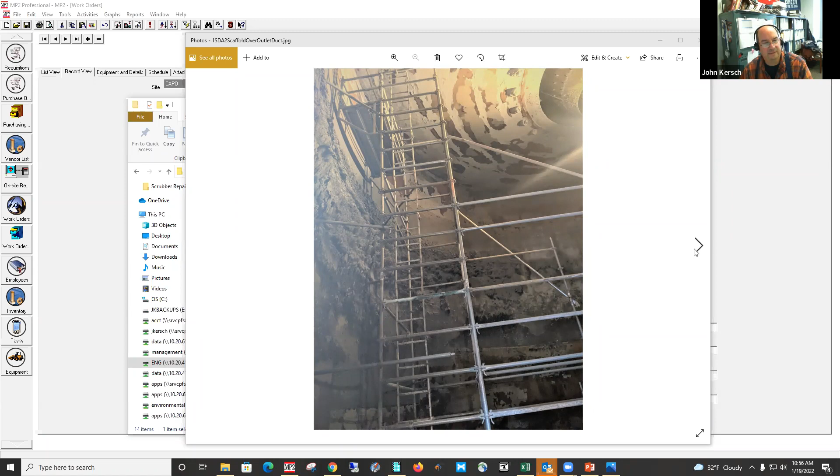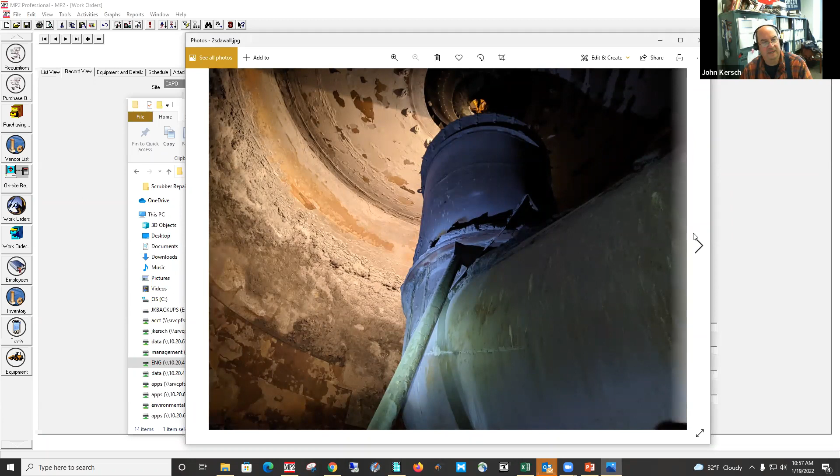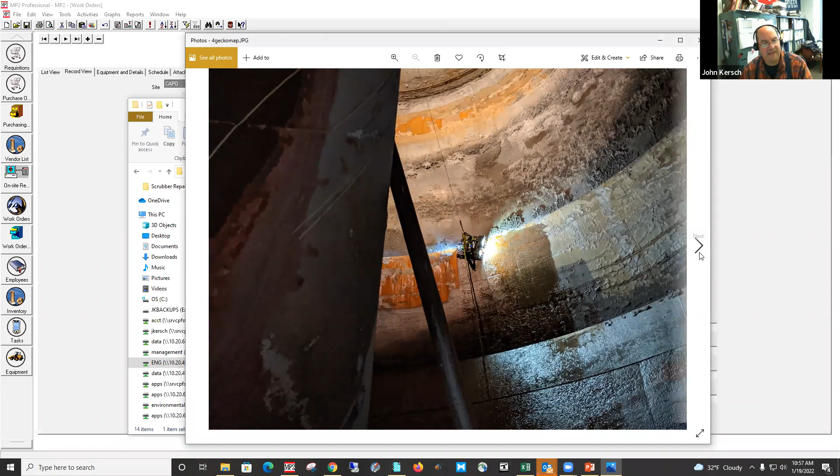So we brought the Gecko robot in, and there's just another shot here. You can see pretty distinctly here where it looks like it's kind of rusty above and below that stainless band that had not been touched at all. And so the Gecko robot comes in and he does his runs around those bands, and he comes back at you with some UT readings all around the scrubber.

And this top picture, if you will, any place that it's white, that's where the stainless was. So you can see where it's kind of choppy and stair-stepped. And just by the thickness readings that we were getting, there was a lot of concern that the scrubber could potentially collapse at either one of those bands. They were both below what B&W later determined as being a safety factor that was going to hold up.

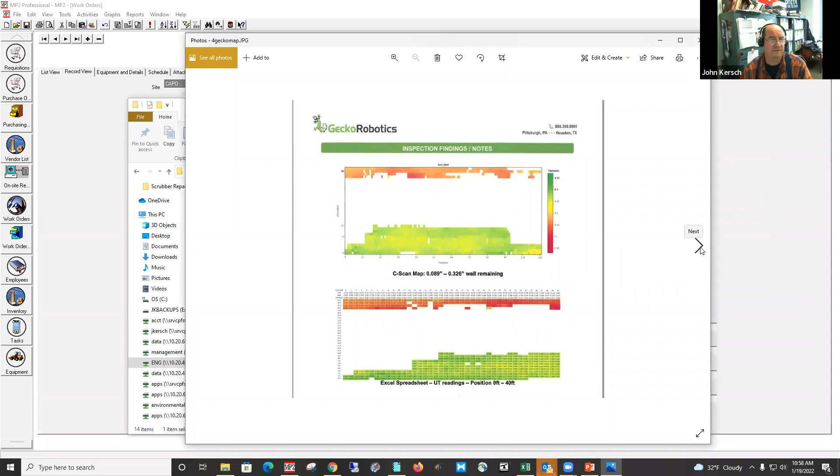With the plant having a projected life at the time of just another 3 years, it was kind of like a what do you do kind of thing. So we formulated a plan with B&W to do some exterior cladding, and we also looked at doing some temporary supports from the outside. That was one idea, to take the load off of the walls of the scrubber. Another idea was to support it up at the top, and then you can see, the cladding there was 13 courses, if you will. And so the repair fix was to do 3 at the top and a couple at the bottom, and then any place else that we had found thinning.

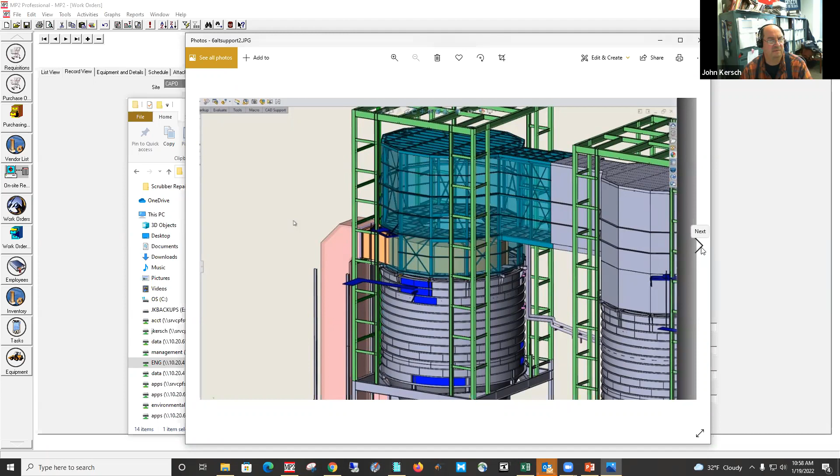Problem became there was a concern about doing this repair work online, because we discovered it during the outage, but we didn't come up with a repair plan until late into the summer. And so I had used Hake Barnhart in the past, and they came back at us with this modular lift tower idea to externally support the scrubber. And the biggest thing is that could go in right away. There wasn't a big delay there.

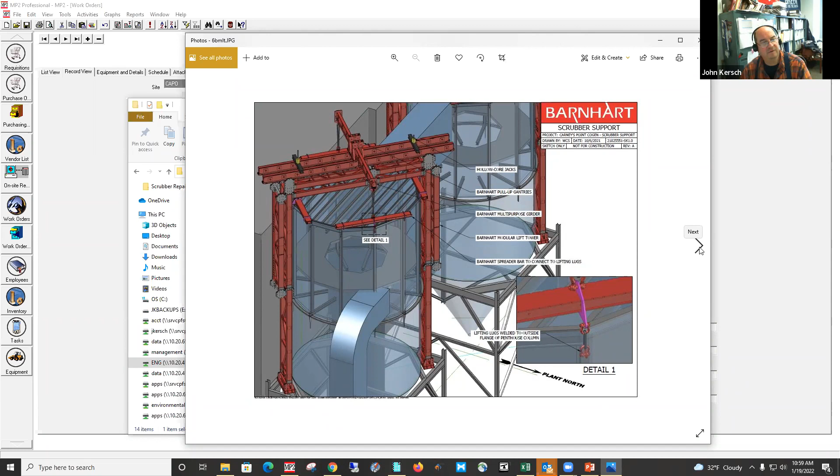And what we ended up doing was there's 12 roof beam supports that go around the scrubber, and B&W was able to determine if we put extensions on these that we could support the scrubber vessel while we did the cladding repairs. And here's one of those beam extensions. And then what they would do is shackle the cable to that. And we actually ended up going right through the duct because the unit was off at the time. We just went right through the duct to support it.

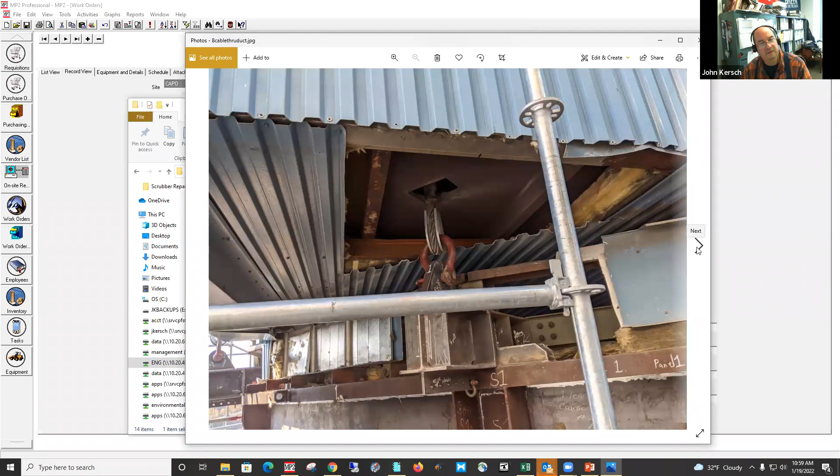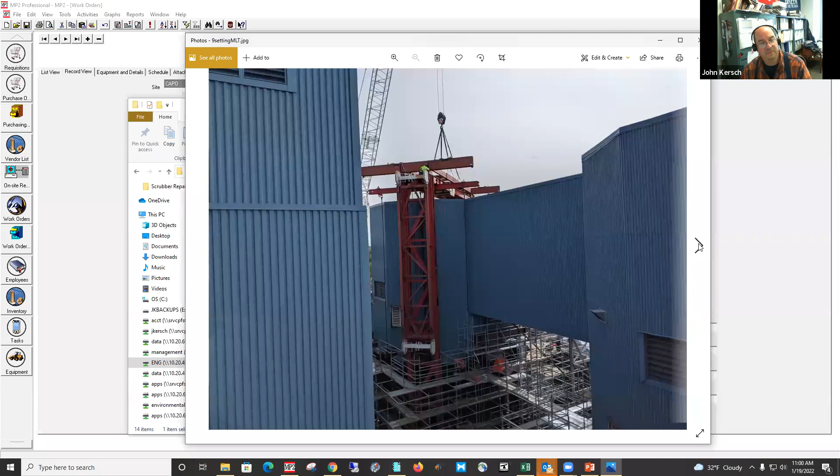And so this is an exterior shot of them setting it up. And of course, you had it completely scaffolded around the scrubber. We stripped all the insulation and lagging off, found a lot more areas that were thin than we were expecting. So the work scope definitely grew. But it was kind of a unique solution to the problem.

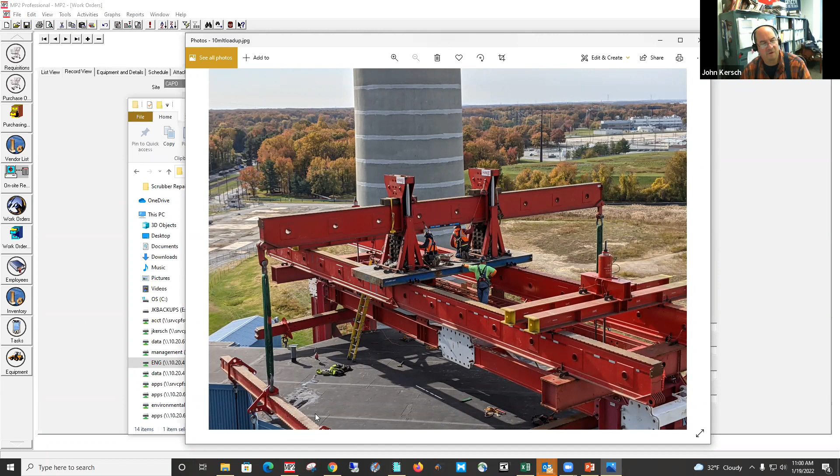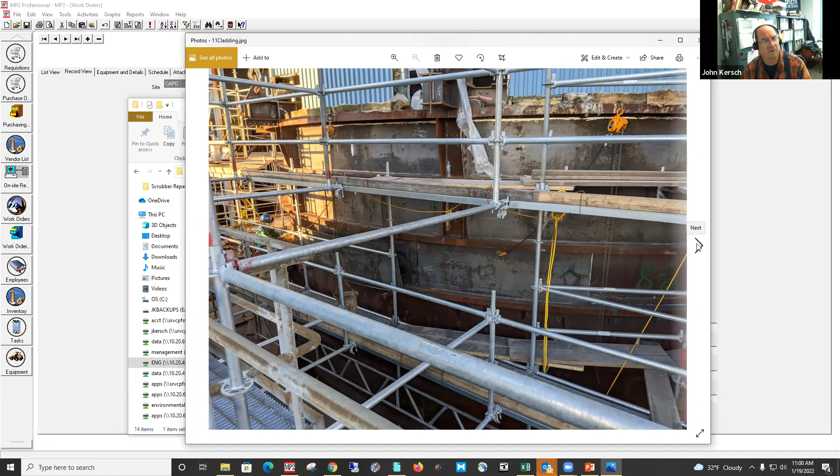They have these things called pugs, pull-up gantries. So basically, once the shackles are all in place all the way around at the 12 points, they jack it up to take the load. And that allowed us to then do the repair work and minimize the risk to anybody doing the work. And we were able to get the units on pretty quick after that. Here's just one shot of the carbon steel reinforcement that we put on. And both scrubbers were pretty much in the same boat, so we did the work on both of them. And then this is a shot here where they're both up and supporting the structure while we're making the repairs.

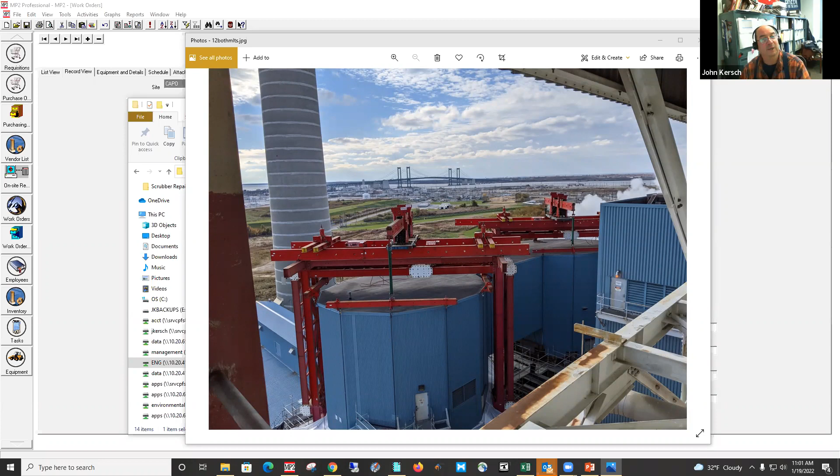So let me see if I do this right to figure out how to stop sharing it. Hang on a second, guys. My screen has gotten small here. All right, there we go. All right, we're back.

So that was kind of a quick, long-winded discussion about what we ran into here. And it was not something that we were expecting. When we were originally going to run the robot around, we figured, okay, we'll just confirm that we still have meat left on the walls and it'd be no problem. They came back with the walls are thinning and I'm like, hey, we got a problem. So we ran the unit until we pretty much formulated a plan and then shut down to do the repairs. And then, like I said, once we felt we had the upper bands reinforced enough, we restarted the units with the support still in place.

Okay. So it's kind of a unique solution to not an uncommon problem. The scrubbers had been reinforced back in the 2006, 2008 timeframe with the stainless. And then nobody ever thought about it again. Changes in management, changes in personnel, changes in ownership. I said, well, why don't we just be safe and go check it? So.

Thanks, John. So curious, I guess two-part. We've also got an audience question about this too. Timeline: how long did it take for this project to go from when they first mobilized to where you were ready to run again? And then the second part was the audience question: have you installed any sacrificial corrosion protection after or as part of the project?